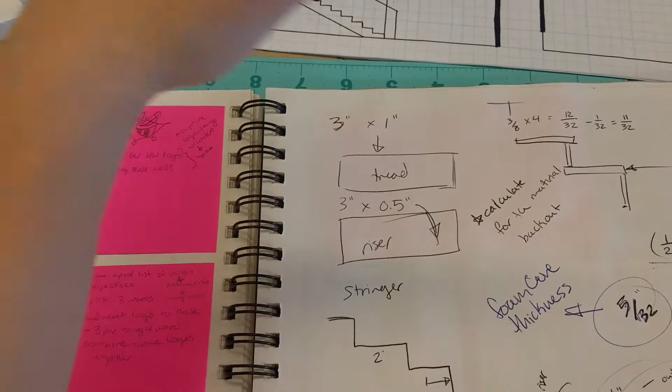I'm Allison Sedlow, and today we're going to be talking about modeling staircases for architectural projects. Currently I'm working on modeling a very important stairwell, and I just realized how hard it is to find any kind of resources to model stairs at all that isn't just straight up building them. So I thought I would talk today a bit about going through and figuring out how to model them.

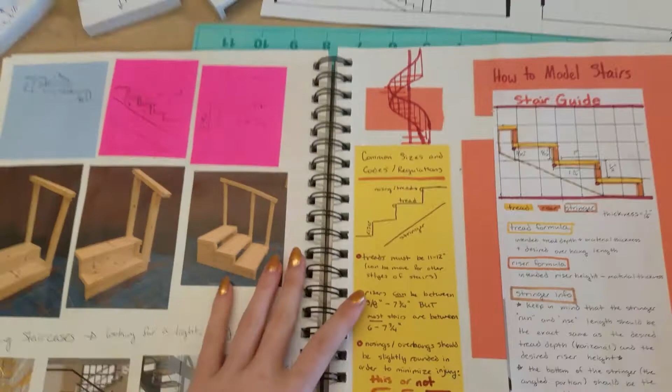Don't worry, we're not going to be going by these notes. This is just so I have a reference of just how much I had to go through to figure out exactly how to model stairs. These are actually the notes we're going to be going by. And I did 3 models. Let's see.

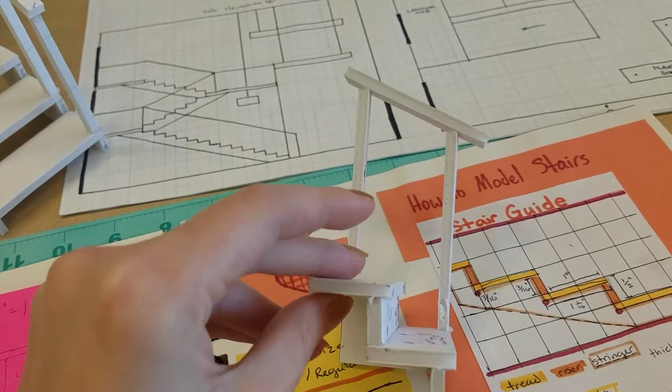This one was the first one, and it's to a 1/2 inch scale. Wait, it's where an inch equals a foot. So inch equals a foot scale. You can see that I did a good bit of writing just on the model, which is very useful for all kinds of things when you're trying to just work out stuff.

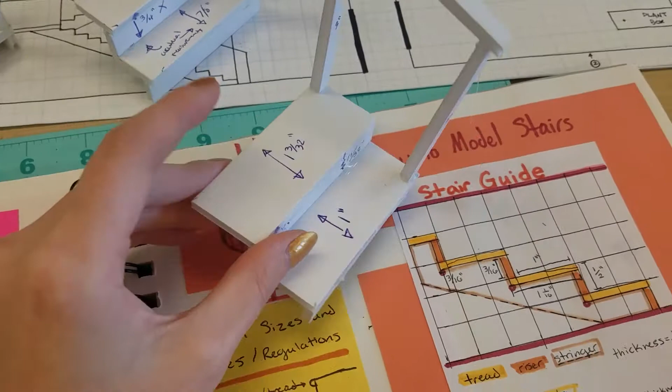This was the second model, and I wasn't too happy with it, but that's okay. And then I did a final model that was a floating staircase. So yeah, this one has 3 parts to the railing as well, so that's good.

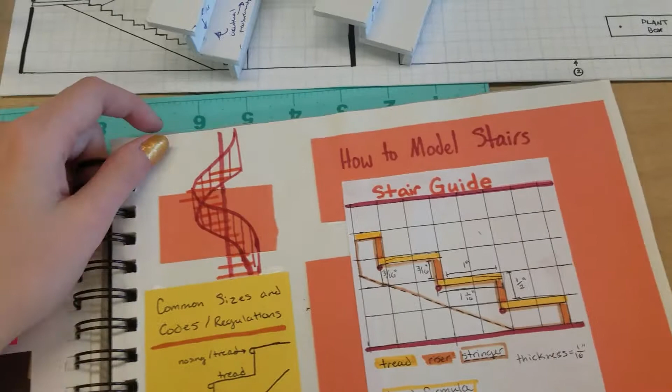Stairs in general are just really hard to model, so I wanted to go over the parts of the stair, how to figure out how far you have to go and how many stairs you need to go so many feet. Whenever you're walking, the part of the stair where you put your foot, that's called the tread, and the distance between the treads, that's called the riser. And then the under part of the stair is called the stringer. It can be cut out like this, or it can be completely full and covered in, think like the area under the staircase, like it's just a wall.

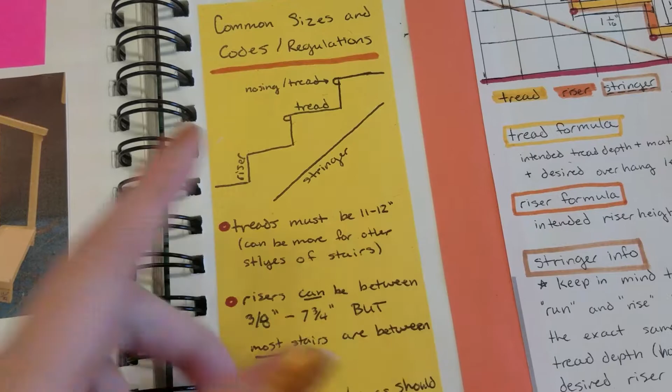Treads must be 11 to 12 inches, although they can be more, like I think they're called Roman or Greek stairs, where they're just very, very deep, and then it's like a rise of 6 inches. Risers can be between 3/8 of an inch and 7 3/4 of an inch, but most stairs are between 6 inches to 7 3/4 of an inch.

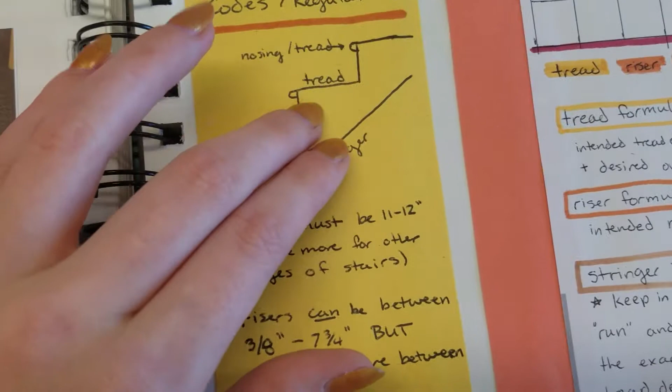And then nosings and overhangs. These are the little boop parts. Those are the nosing and overhang. On this part there isn't as much, but they have to be slightly rounded so that way you can minimize injury, so it's not a razor sharp edge to your stair, it's more rounded. Most likely it'll be like this just because of wood.

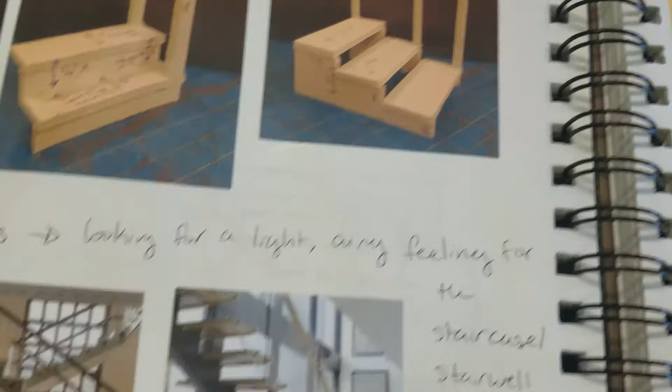And then stringers are extremely customizable so long as they support the treads and or risers. I said and or risers because you don't have to have a riser, you just have to have that negative space that shows how it rises up the stairs. These are completely open stairs, as in there is no solid riser, it's all void. These are completely solid stairs, and then these are a single stringer floating stair with a railing. Technically, I guess you could say that this is also another support, but the stringer is the main source of support for that one.

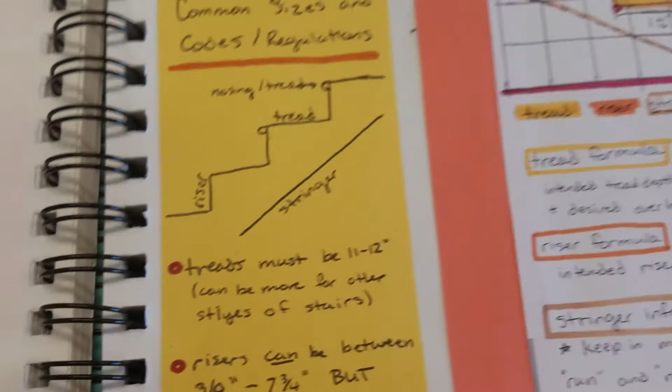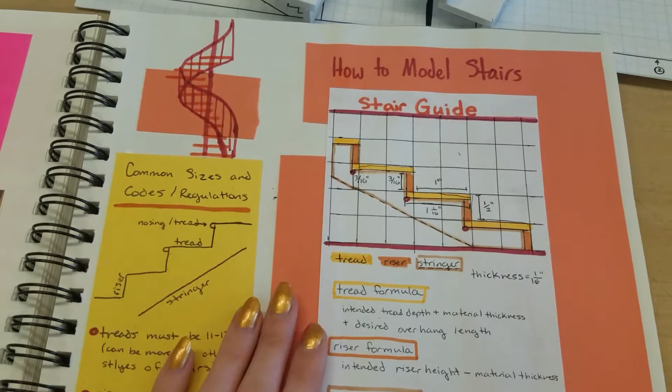We're not going to go into spiral staircases, but I'll put some resources down below because those are extremely hard to model as well. And I'll put a whole bunch of different resources of people that I follow that have given some great resources for modeling stairs. Okay, so how to model stairs.

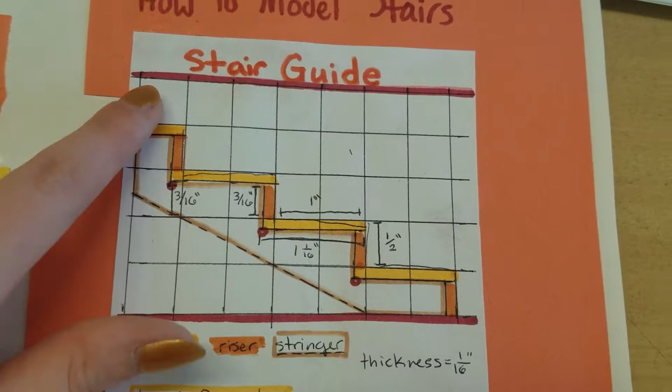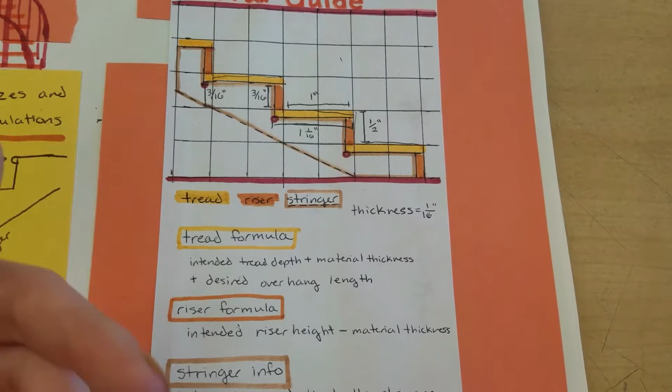This is, again, the stair guide. This is the tread, this is the riser, and then this is the stringer under here. And these little points right here are referenced down below in the notes. At the end of the video, I'll put a nice quality picture of this page of notes, as well as the other page of notes that has little doodles and the pictures of the models.

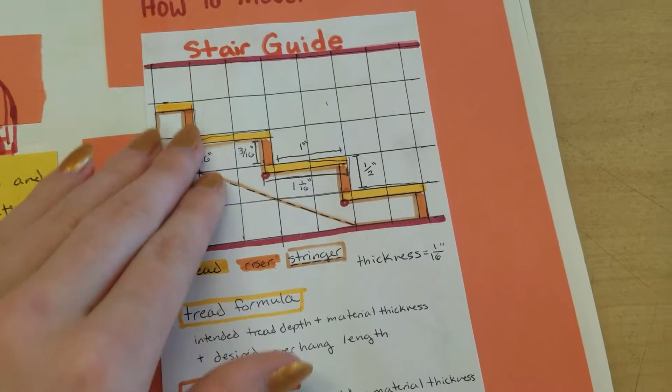So tread formula: normally whenever you're making stairs, you have in mind how tall you want your stairs to be, and how deep you want them to be. Again, treads just have to be enough where you could put your foot in.

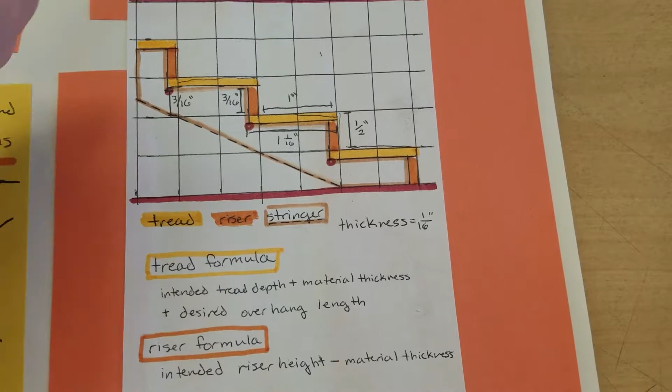So greater than or equal to 11 inches. So when you're trying to figure out exactly how to model them, you have to keep in mind the thickness of the material you're going to be modeling with. For these, I use poster board, which is, let's see, it says on this other page that it's 1/16 of an inch.

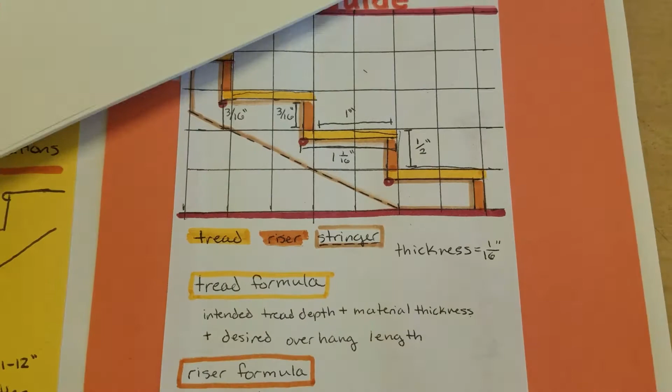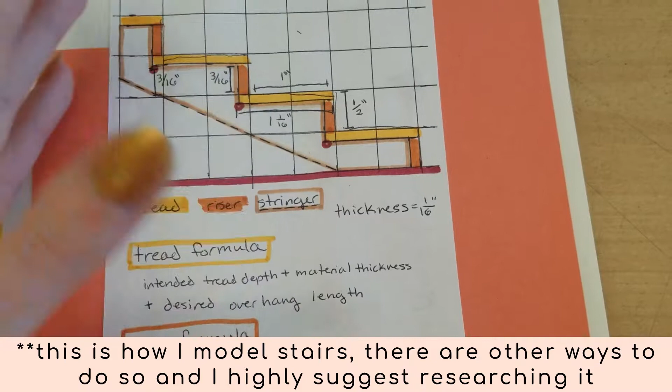In this little example right here, I was actually considering mat board as my material. So I put right here that the thickness of my material was 1/16 of an inch. So keeping that in mind, you work through the tread formula. So however deep you want your tread to be. For me, I wanted it to be 1 inch. And again, this is 1 inch equals 1 foot scale. So I wanted my tread to be 1 inch. The material thickness is 1/16 of an inch.

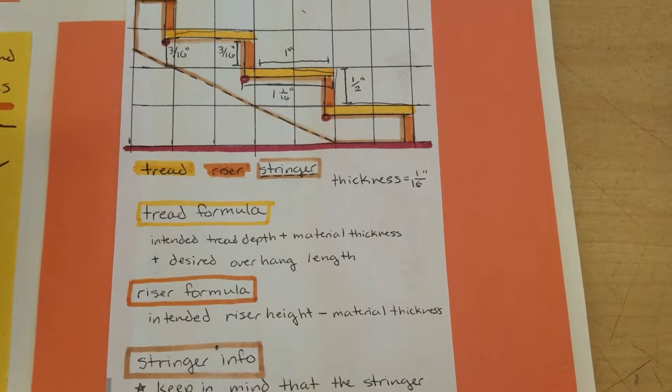And I didn't want an overhang length for this one, just so I could keep it flush with the risers and just keep it as simple as possible for myself. So I had 1 inch plus 1/16 of an inch plus 0. So I would actually have, right here, this entire board is 1 and 1/16 of an inch.

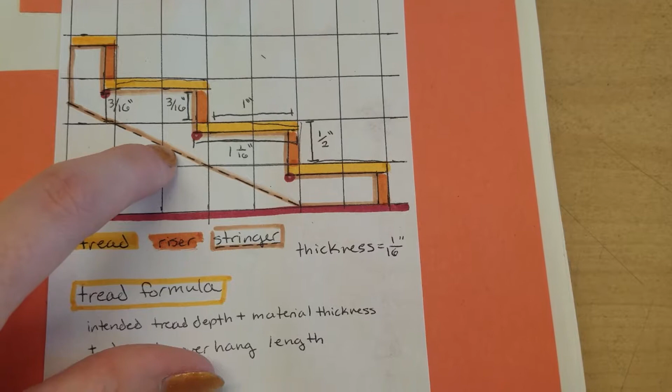Then the riser formula is the intended riser height. I wanted 6 inches, or 1/2 of an inch, for the riser height, just because that's really easy math, or as easy as my brain can comprehend it, minus the material thickness, because the way that I model my stairs is I start with the tread, and that's always what you see, because the riser never goes above the tread. You don't see the riser over it, and that's how most stairs are. The reason that we subtract the material thickness is because this right here accounts for at least a little bit of the rise.

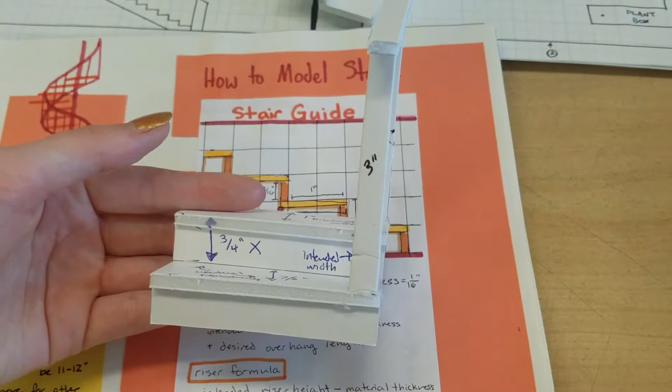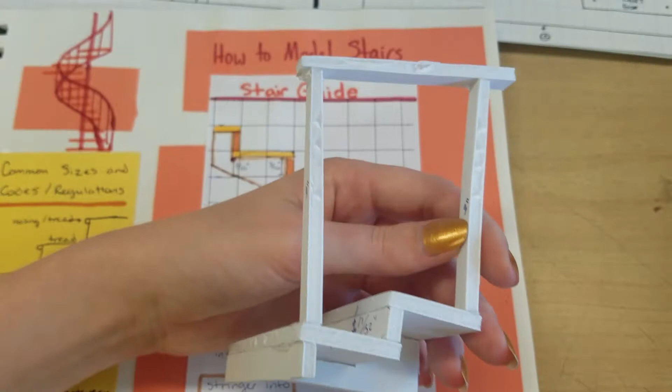And so yeah, it's a little bit difficult to figure out at first, but I highly suggest just doing a sketch model or two to figure it out with some cheap materials. So I just got a poster board that was in the scrap pile of my department, and that was pretty easy to just grab and go. So for the riser formula, you do however high you want it to be, minus material thickness.

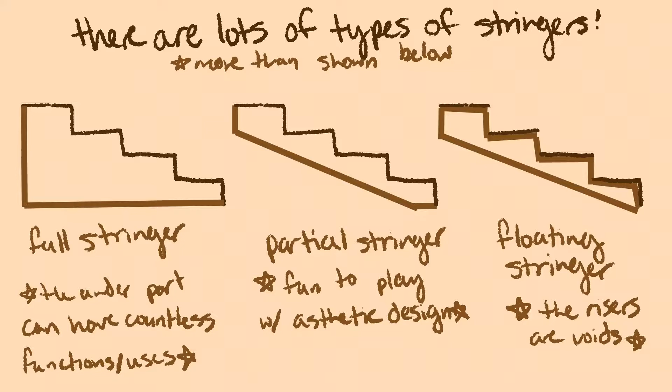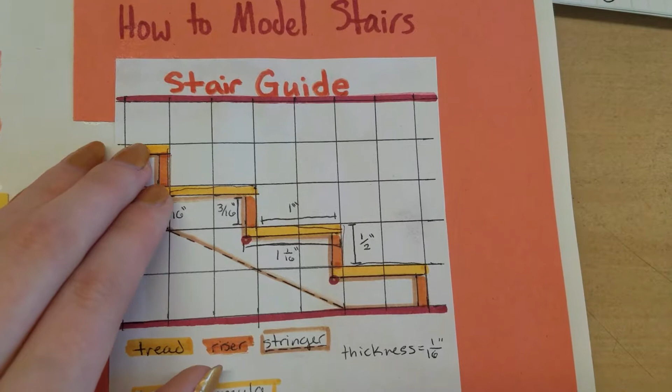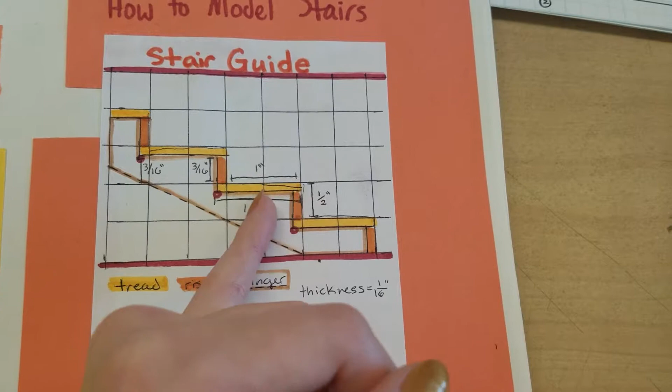And then stringers, they are very important. They just hold up the structure for the stairs. So you want to keep in mind that the stringer run and rise length should be the exact same as the desired tread length, horizontal, and the desired riser height. Essentially, this outer line right here that follows the yellow and orange on the outside, if you move it over and down a little bit, it'll be exactly the same as the stringer itself. So it'll be like boop, boop, boop, boop, boop. And it's the exact same, because right here, this is 1 inch and this is 1 inch, but you stop it right here before you get to the riser. So that's just what I'm talking about there.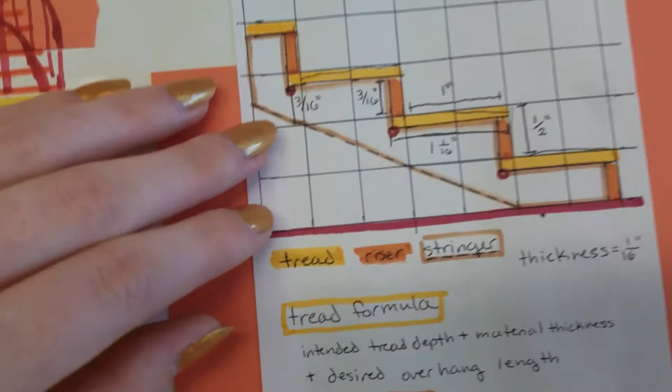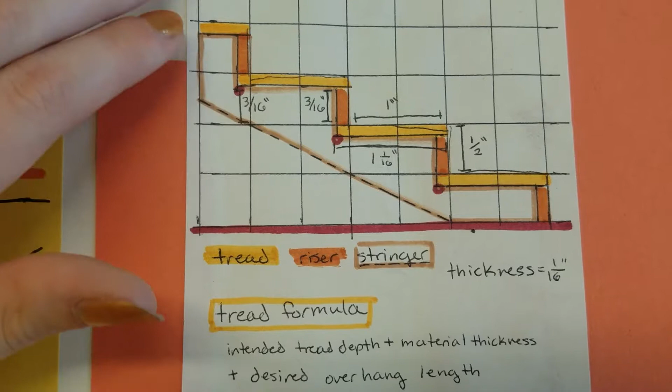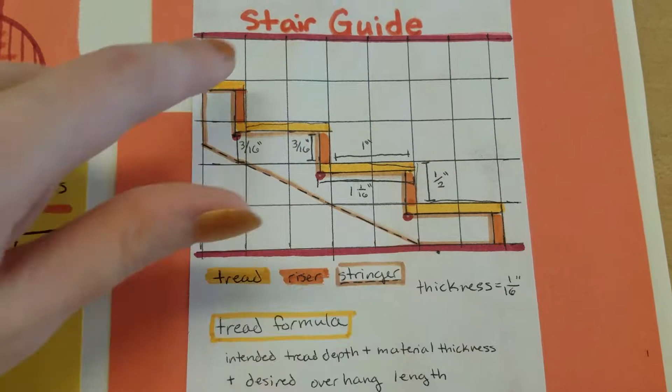And at the bottom of the stringer, the angled portion should be riser height below the bottom of the stairs. So what I mean by that is, see this little red dot right here? We're going to go back up here, and it says that it has to be 1 riser height below the corner of the tread. So right there, we're going to do 3/16 of an inch downward, and then we're going to do that for every single one. So this is the line that we get for that. This grid is actually 1/2 of an inch by 1/2 of an inch, so that's why it looks like that. So that's all really good information.

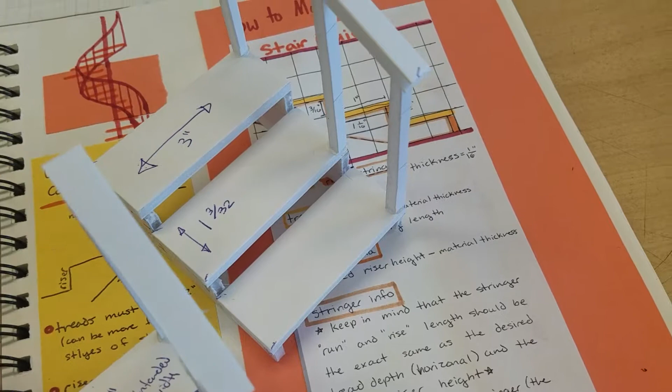And then the common sizes and code regulations. We already talked about treads and risers, but railings are also very important. I think that the average minimum is 3 feet tall. So I made mine on all of my models 3 inches, because all of the models are made at 1 inch equals a foot.

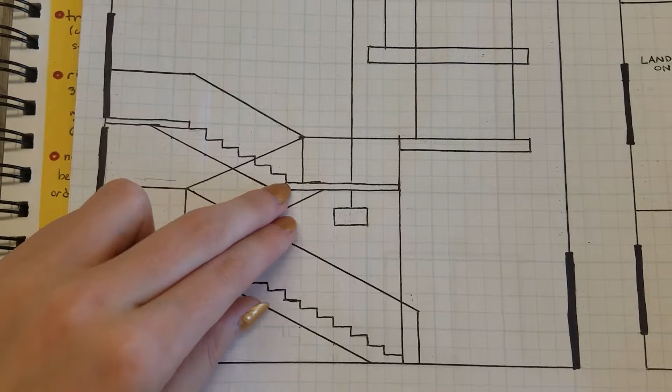And then I was just going to show you how to draw up your staircases in your plans. So this is currently a project that I'm working on. Hopefully I'll be doing a little run through of how I built it. But from the side, this is how I normally show my stairs, because the proportion at which you show your stairs is that the tread is always a 2-to-1 ratio of your rise. That's the easiest way to just draw it out in your plans. So that's really good to keep in mind. And so I did 1 block, half a block.

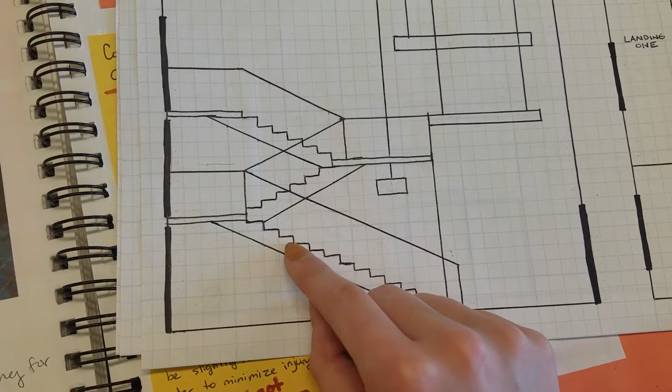I'll just zoom in a little bit. So you can see that this is perfectly in the middle of each block to show that the rise is 6 inches. And I accounted a bit for the stringers as well. I did it a little bit more just because I wanted to have a lot of support.

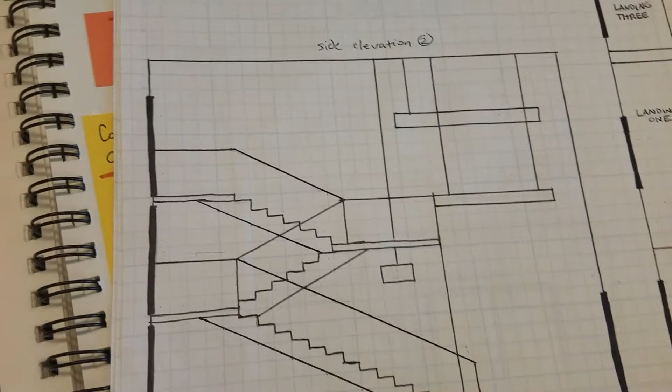And then the way that I draw these out in my plans from the front, it looks like this for me. I've seen some where they just draw the lines as well, but that just confuses me, so I just do the little arrows if it's going this way, and it's going this way, it's going this way.

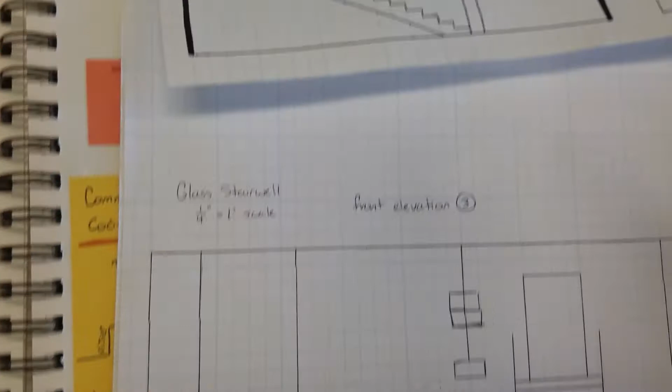One thing that can be helpful, because these plans are a little confusing: if you compare these plans to the side plan, the side elevation, then you can see that this is like the back of the stairs. So this stair is this stair. So let's imagine we're standing right here and we're looking this way. In this plan, because that's how we're viewing it, this would actually be the underside of the stairs.

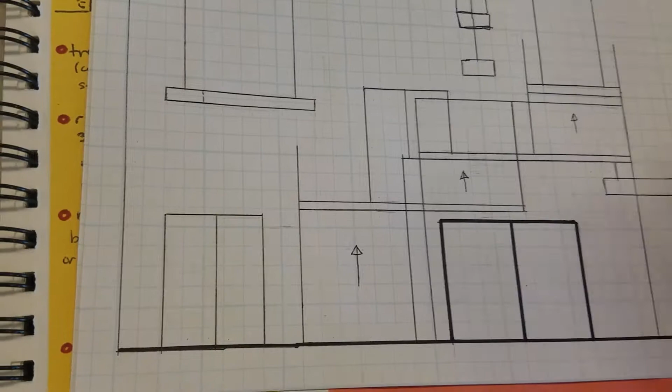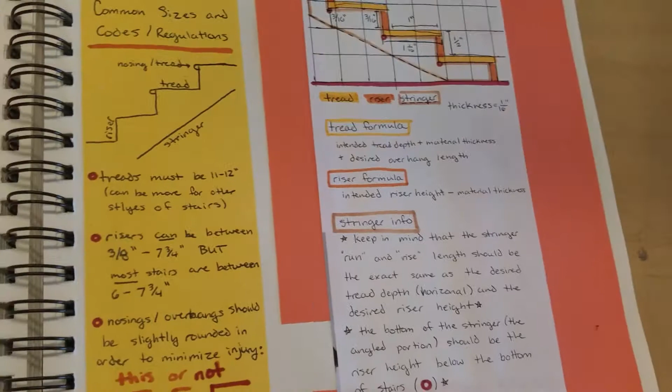So that can be confusing if you're showing this to a client or if you're trying to explain your concept to someone and get their critique, which I highly recommend. It's very good practice to make sure that you are making a connection with the people who will be using your building. So what might be a bit more helpful is if you shade that in very lightly with a drafting pencil or just a mechanical pencil. That's very, very useful.

But yes, it has a lot of great resources. It has a whole bunch of pictures of different kinds of stair types. It shows really old types. It has some works from Frank Lloyd Wright, which is very interesting because he's a very famous architect, so it just shows a lot of different stairs. I haven't been able to go through the entire book yet. I've only gotten about 20 pages in so far, but it does have some good text to read. It has a whole bunch of great photos.